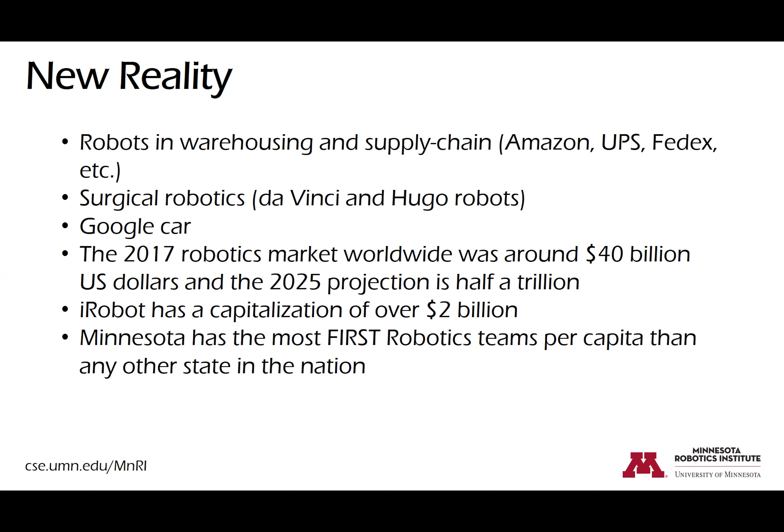And if you look at the numbers, they are staggering. For example, the projection is that the robotics market worldwide in 2025 is going to be $500 billion. If you look at companies that really were disruptive in this whole robotics enterprise, iRobot has sales of hundreds of millions of dollars and a capitalization that exceeds $2 billion. And if you look at outreach, robotics is one of the most effective ways of reaching all these kids and promoting science and engineering. And Minnesota has more FIRST robotics teams per capita than any other state in the nation.

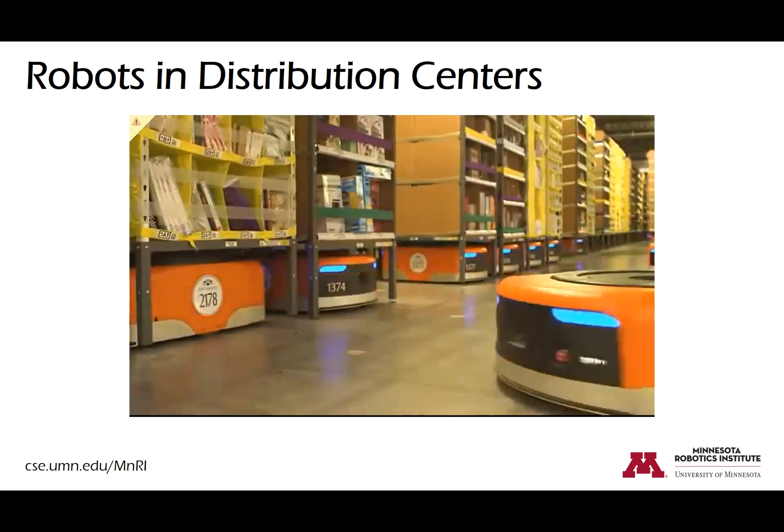So I want to show you a few video clips. This comes from Amazon. And we're going to see all sorts of mobile robots, manipulators. So the orange ones are basically Kivas that became Amazon Robotics, which are used in order to move goods. And these do not only need to interface with other robots, but also they need to interface with humans. Especially in busy periods, one of the biggest problems is actually how the human workers may interact with these mobile platforms that you see here.

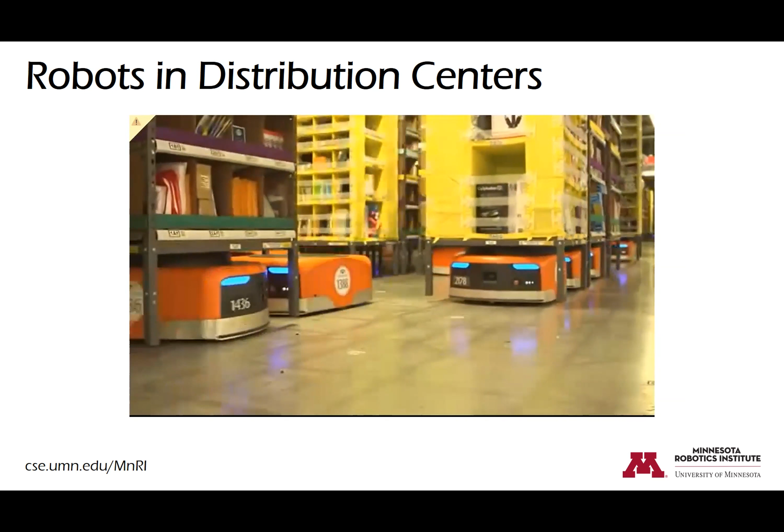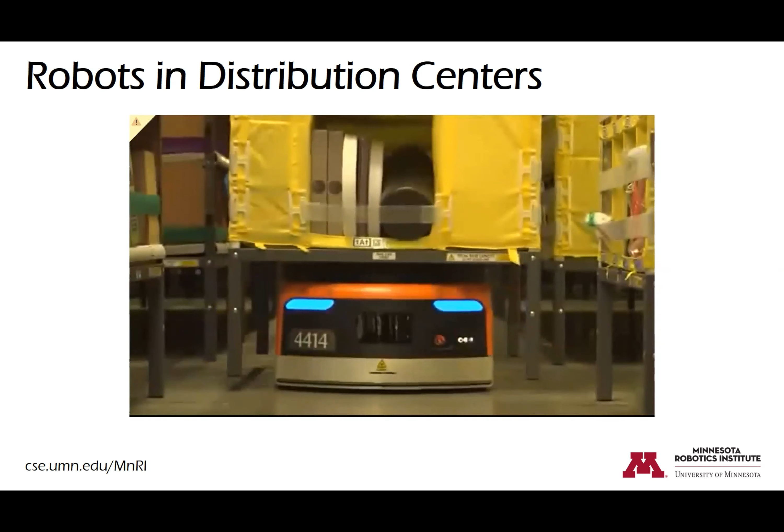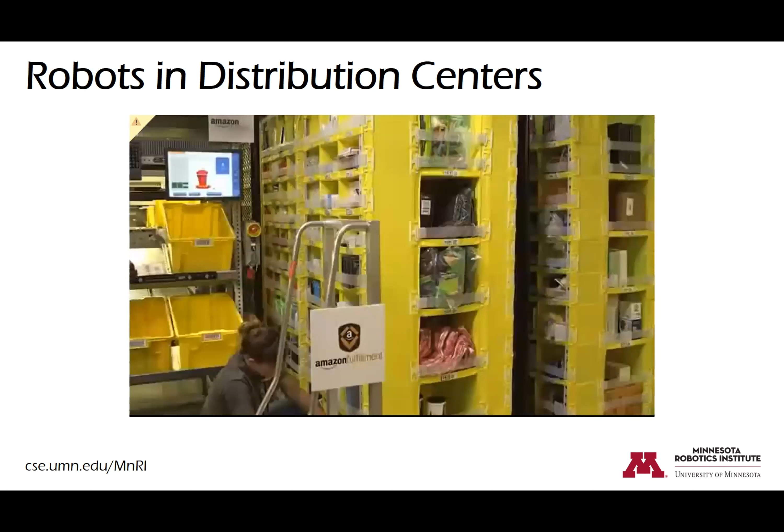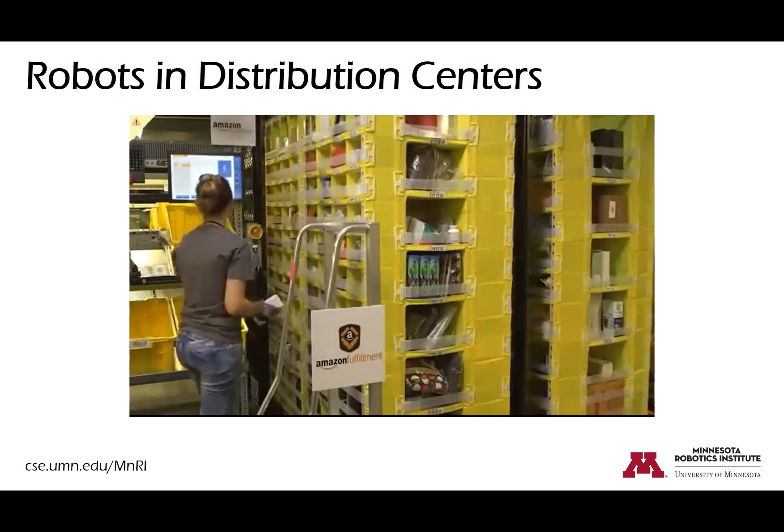Now, the implications of robotics are fairly obvious when we see all these problems in supply chain. And think also about automation and robotics being part of autonomous trucks, because we have a tremendous shortage of truck drivers, and what robotics technology may offer in that domain as well. Another aspect that's very interesting and is not clear from this video is the use of robotics to augment the capabilities of the human worker, like exoskeleton devices that the worker can use in order to be able to lift weights.

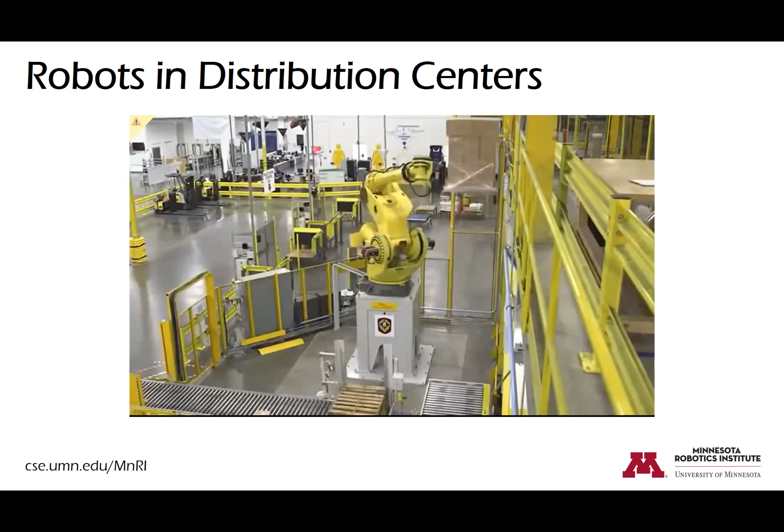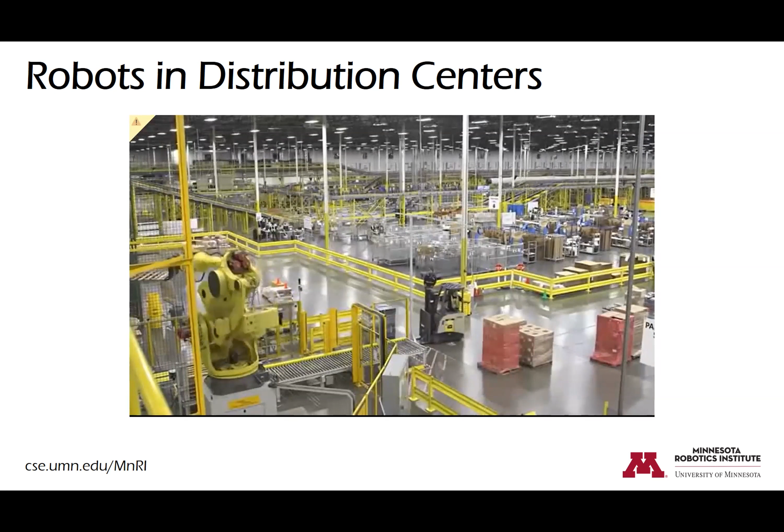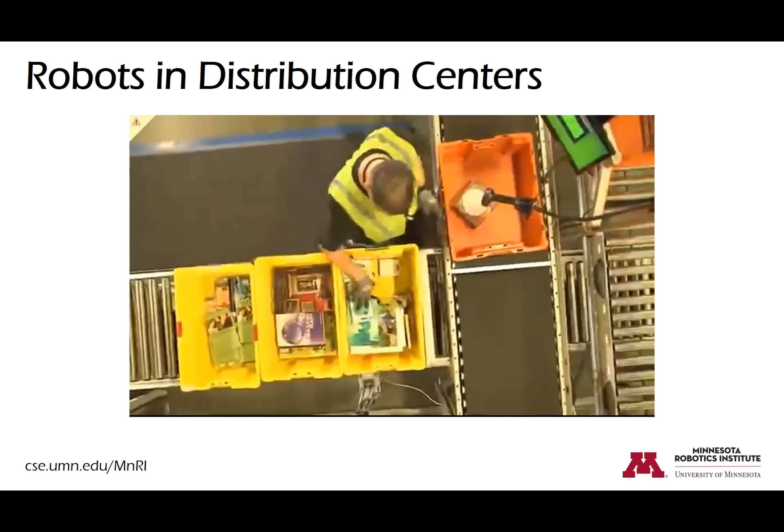Here you are going to see something that is little known, but Amazon warehousing is one of the heavier users of all these monsters, manipulators that move whole pallets. And you can see, if you visit the Amazon facility in Shakopee, some of these robots in operation. And these are used more heavily in 24 hours than the Kiva robots. With the Kiva robots, there are still issues of integration, interaction with humans, and so on and so forth.

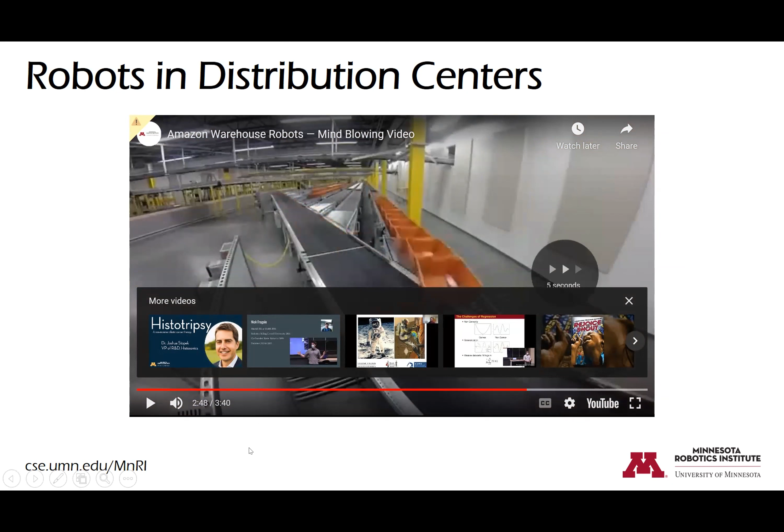So I'm going to stop here and move on. So if you look at some gaps, and these are a few of the reasons that drove us to create the Robotics Institute, there is a lack of proper training that blends robotics with other disciplines, for example, design, ethical issues, engineering, real-time programming. And we need a more holistic approach to the curriculum that is going to provide the proper background. There are concerns about data privacy and a loss of jobs.

And in fact, whenever they ask me about this, I mention the example of Protolabs, which took an industry that was lost in Minnesota, and now they employ more than 2,000 employees. There is injection molding, but injection molding in the digital age plus 3D printing, and it is one of the companies where the presence of UMN alumni is very significant. And I mention this as an example of additional jobs that we can create by effective use of robotics and automation. We need to rethink and redesign planning, control, sensing, and actuation with an emphasis on producing real-world robotic systems.

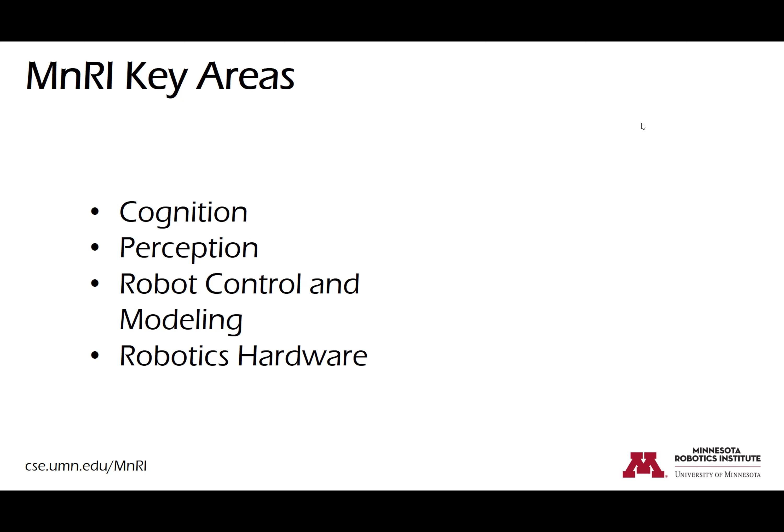Some of the work that is happening at MnRI and the students of MnRI, who are not only the master's students but the PhD students: I will show you the work of Ruben Desa on a transformer UAV. And you can see a UAV that starts as a quadrotor. Ruben was with us as a freshman, then moved to OpenAI, and now moved to another startup in Silicon Valley. And you can see how the device was transformed into a fixed wing state. Another transformation to a quadrotor. And you can hear the screams, and you can see Ruben celebrating.

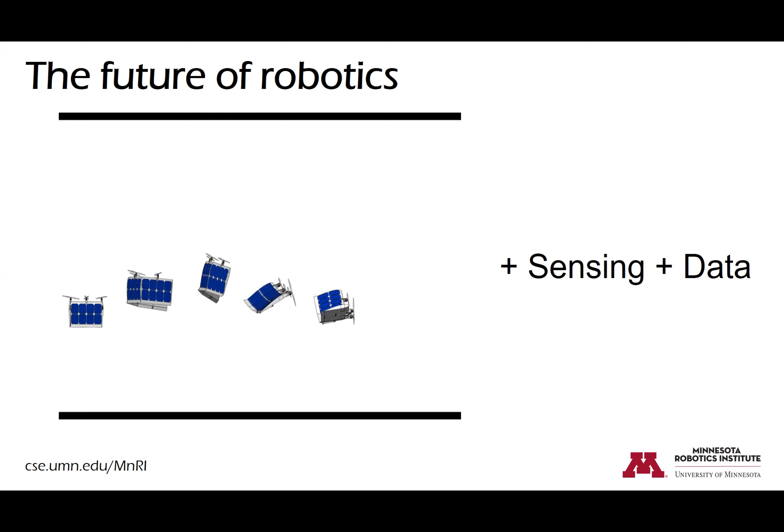My view of robotics is that robotics is all this very cool hardware, but even if we forget this hardware, what remains is actually sensing and data. We are seeing more and more advancements coming in data-centric systems, especially if you look at medicine or agriculture.

The new direction is that we need to take data as part of our mission and training. We want roboticists who can harvest, process, analyze data, and extract useful insights. There's no current training for roboticists that brings together skills such as machine learning, statistics, cloud computing, and visualization.

Let me say a few words about the master's in robotics. Currently we have 65 students, minus 5 who graduated early this fall, so 60 students. We plan to accept another cohort of around 35 to 40 students. This is a 31 credit course, heavily focused on research, either with a Plan A master's thesis or a Plan B capstone project.

The elective courses are provided by all sorts of departments, ranging from design, housing and apparel, to aerospace engineering, computer science, electrical, mechanical, biomedical, statistics, and math. We have 65 faculty involved to some degree. Another characteristic is that we have a very high retention rate. All these years, we've lost only 2 students, for reasons that didn't necessarily have to do with the institute or the efforts.

More than 50% are directly supported by MnRI, teaching assistantships, or research positions. In fact, as I'm interviewing new admits, it's very difficult to convince them because the majority of other master's programs, almost all of them, do not offer any financial support. But we're very fortunate that we have MnRI support to support these kids in their education.

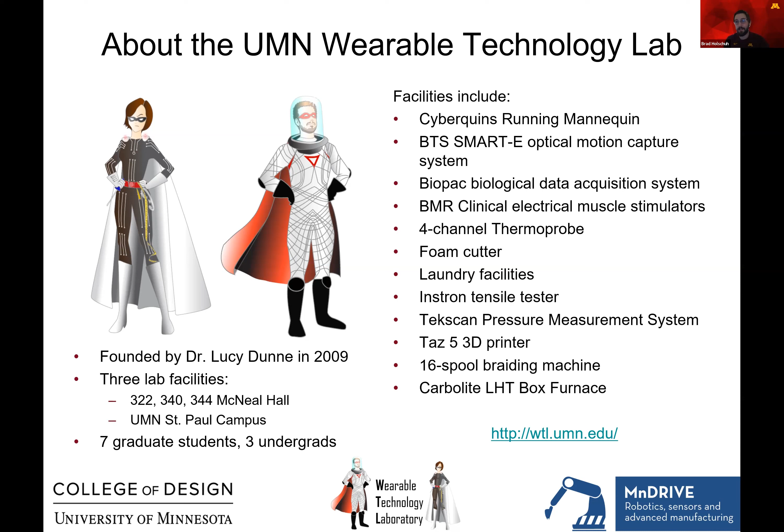So to get into what I want to talk about today: we think about wearable robotics, but in particular we look at soft robotic systems. So getting away from the paradigm of big, rigid, powerful, but bulky systems on the body, which are sort of the robots classically imagined, with exoskeletons being a prime example. They're big, they're powerful, but they're rigid superstructures that sit on your body.

What happens if robots now enter this space of soft robotics, which, as we all know, is an emerging discipline? What if those are soft robots that are on our body? Can we get them to the point that they're indistinguishable from the clothes we wear every day? And what does that mean while providing some sort of robotic aspect of control, actuation, and sensing to a person, without sacrificing the important things we care about in the clothes on our body right now?

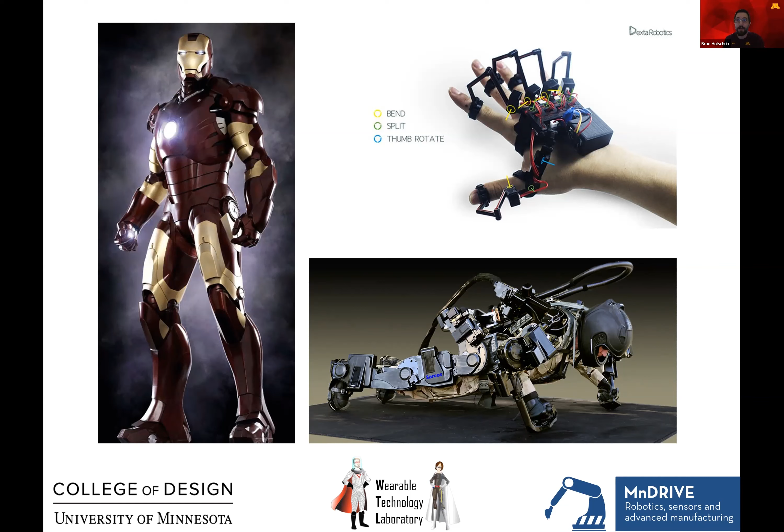So we study in our lab many different types of actuators that are soft in form factor, but still robotic in nature, meaning they have an actuation, a stimulus response behavior that can give us mechanical effects. If you want to define a robot, that's how I would define it. And so there are dozens of materials that are alternatives to your standard hydraulic, pneumatic, or servo electromechanical actuators, that have a mechanical response behavior to them.

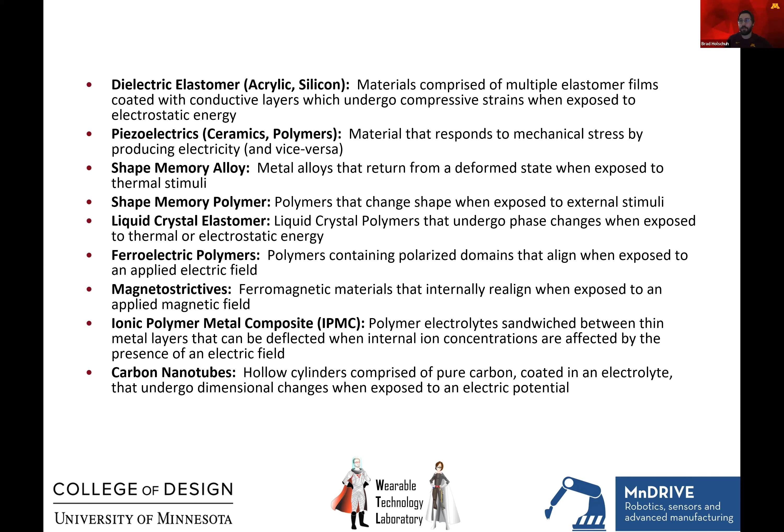So we look at these exotic, oftentimes called artificial muscle materials, in particular for integration into wearable systems. One of the materials we work with often, because of their commercial maturity, are what are called shape memory alloys, or SMAs. They are temperature responsive materials, and over a certain range of critical temperatures, they will go from malleable and deformable into stiff and elastic. You call that the shape memory effect, which means as you heat it up, it will change shape into a shape that we care about.

And that you can engineer. Above those critical temperatures, the metal will act elastically, so you can call that a super elastic effect. There are two really useful properties of these alloys: as you heat them, they will conform and create a shape that you can engineer, and above those temperatures, they will be elastic, so they can respond elastically on the body and be deformed, and provide a force. That's a really useful property.

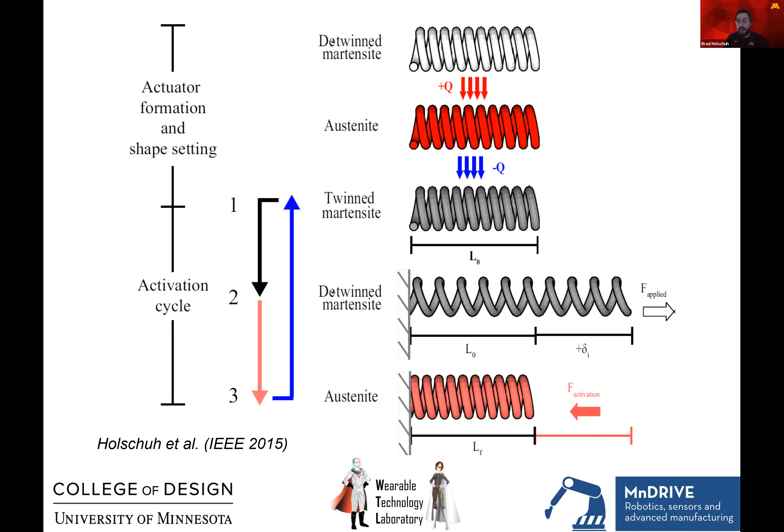We take these materials, which you can buy off the shelf, and do a bunch of manipulations to make them useful for wearable robots. One example is taking these wires and forming them into very tightly wound, millimeter diameter springs, so that they achieve the behavior you see on the screen here: at low temperature you can deform and extend them, and when you heat them up, they recoil and shrink down to their shortest length. In that form, they act as an artificial muscle and produce linear forces and displacements. So here's a video of one of these.

Here we flip the switch, we have an actuation effect. One of those springs is about 1 millimeter in diameter. They run a bunch of them in parallel, and they become a really useful artificial muscle. So this whole structure on the slide is about 1 inch, maybe a bit more than 1 inch in length.

And it's mostly soft, except for those end caps, which we 3D print. Now you can take a structure like this, place it at the seam of an otherwise passive garment, and produce a muscular effect, so a pulling force or a displacement or a tension or a pressure.

We also work really closely in collaboration with another lab here at the U and with another faculty member, Professor Julianna Abel, who's in mechanical engineering and also part of the Robotics Institute, to look at creating textile-based actuators. So can we take these same shape memory materials and form textiles entirely out of these materials? And if you can do that, what are the actuation properties and what are the opportunities then to take these textile actuators and make useful systems on the body?

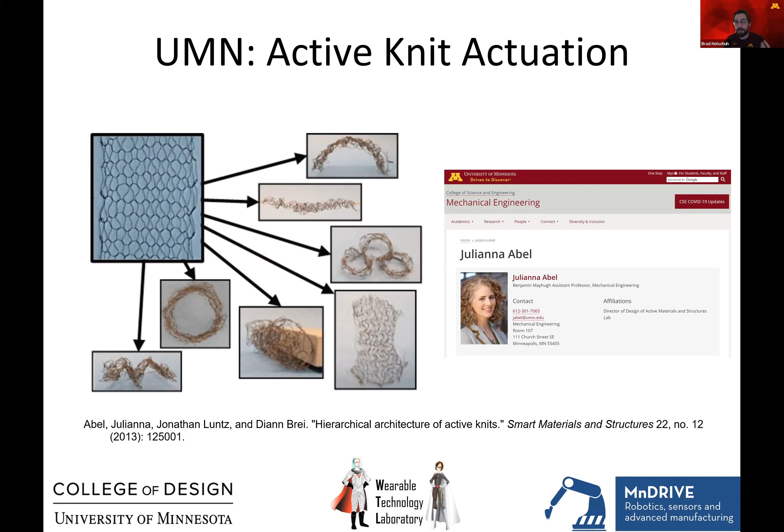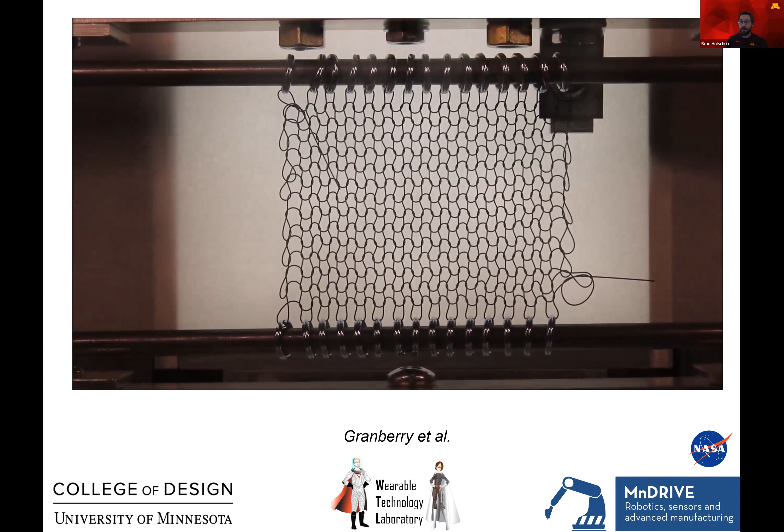One of the strategies that has worked very well is to knit these materials. So this is an example of a metallic knit made from an SMA that, again, when heated up, creates a pulling force, and it's entirely textile based. Because this is a textile, it very easily integrates into a garment, but as you can see, it can create actuation properties where one axis of the textile shrinks and the other axis expands. Every time you heat it up, you'll see this similar behavior.

I don't have a lot of time left dedicated to me, but I'm going to go through a whirlwind of quick examples of how we use these systems to make useful wearable robots. Then we can talk about them in more detail when we have time for questions at the end.

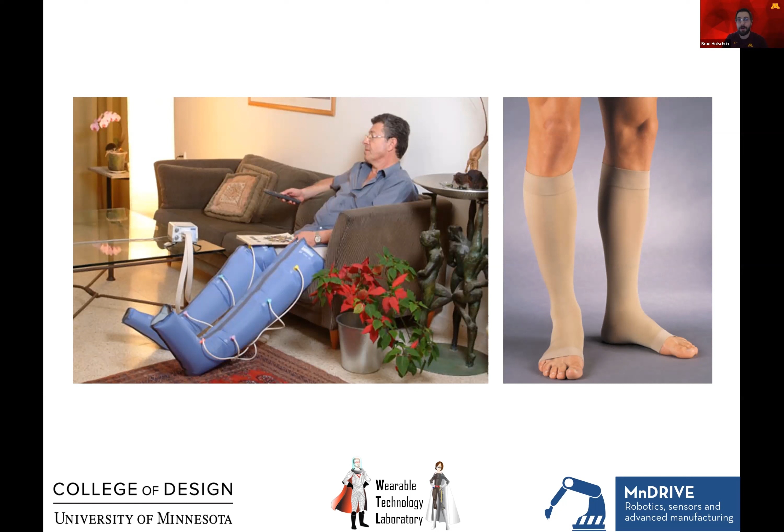One space where wearable actuation can make a big difference is in the medical devices space, in particular in the design of compression garments. Types of compression garments you see on the market right now are one of two form factors: either a big inflatable, which requires you to sit still while they compress you, or an elastic stocking that's too small for you, which is a pain to put on and squeezes you all the time, even if you might not need it.

Imagine now you make a garment that includes some of these shape change materials, and now you can make a compression garment that can squeeze you strategically, dynamically, and change those locations and magnitudes over time to give you much more elaborate medical interventions for poor circulation.

We've had a project with the Mayo Clinic, now with the University of Minnesota Medical School, looking at these as deployable solutions. We also look at compression garments for behavioral intervention. People use compression garments on the upper body to try to calm people down. If you've ever seen thunder shirts for dogs, or swaddled an infant, or worn a weighted blanket, there's a lot of evidence out there that haptic compression on the upper body can calm you down.

But the same problems exist in the technologies on the market today for these types of interventions: either they're a big inflatable, or an undersized shirt that's just always squeezing you, or taken to the extreme, a crazy contraption like you see in the bottom left here, where you stick somebody in a giant roller device just to push against their body.

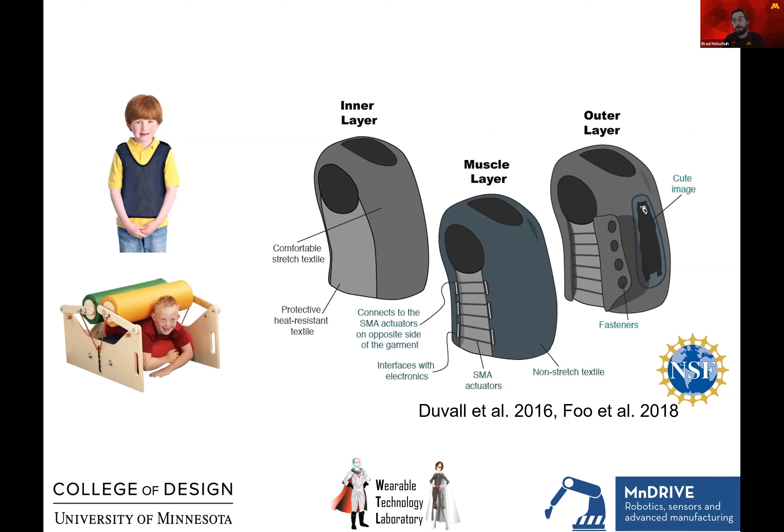We can make upper body garments that do the same thing, with these actuators effectively hidden along the seams, giving dynamic compression at the flip of a switch or by a press of a button on your phone. Here's a child-sized garment that can give you dynamic squeeze, and we've been able to show you can squeeze people beyond the magnitude of a medical grade stocking unobtrusively, using these actuators, again, hidden down the seams of the garment.

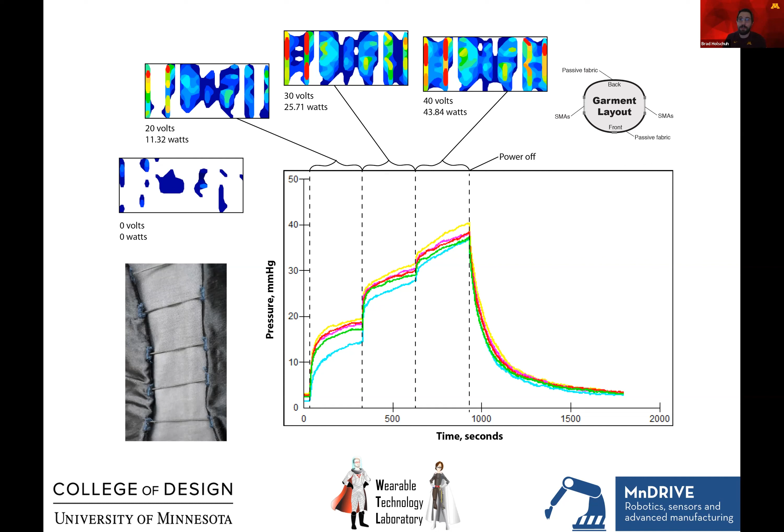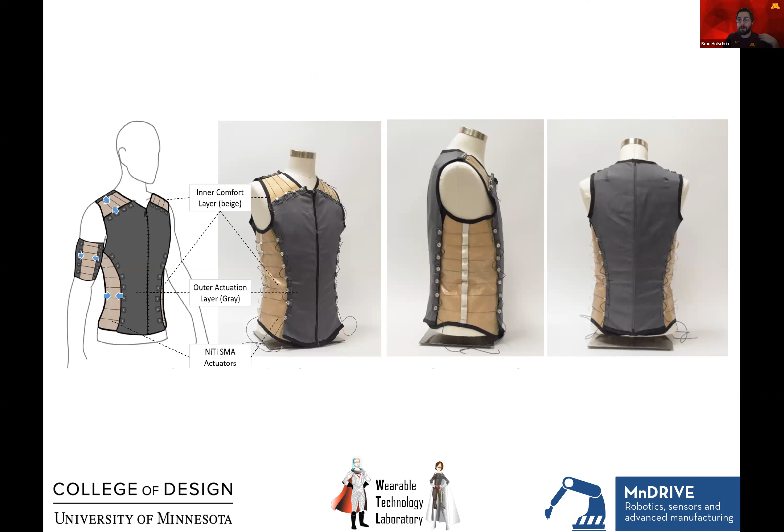We can also produce these for adults. There's no reason this can only be for children, even if we're targeting things like anxiety, autism, or sensory processing disorder. Adults respond well to this stimulation as well. So here's a garment that, down the side seams, across the shoulder, even down the arms, can create dynamic compression. We've also started studying these systems as interactive devices for virtual and augmented reality.

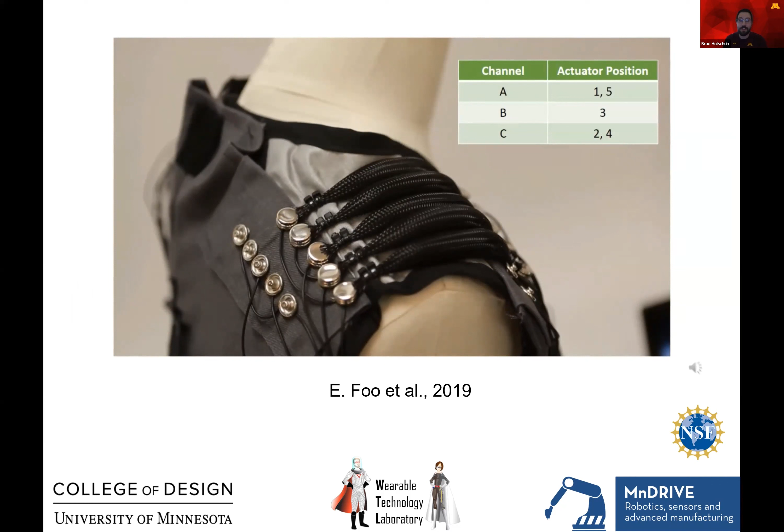So now having this ability as a platform across the body to squeeze people strategically to give them stimulation can create opportunities for novel experiences. This is an example of one of these garments in action. The great thing about these actuators is each one is effectively just a resistor, so you can control them independently from one another. Here you see us toggling some of the channels across the shoulder and then strategically activating more and more of them to create dynamic effects, both spatially and temporally. This is all relatively easy to do with these types of actuators.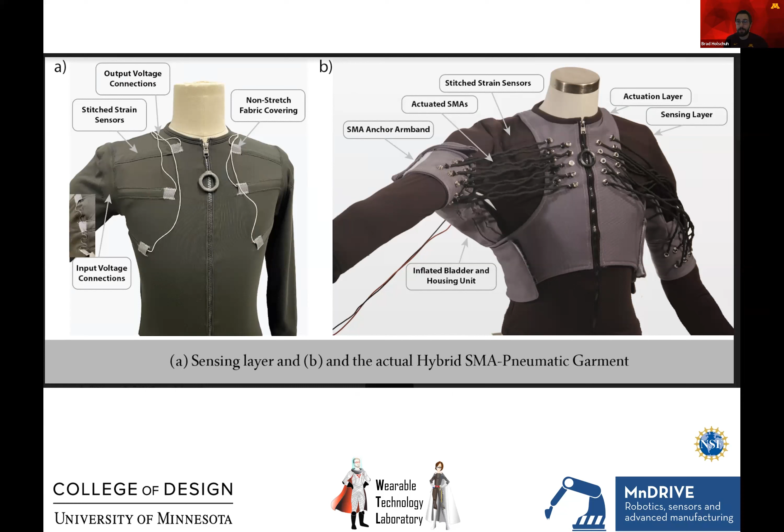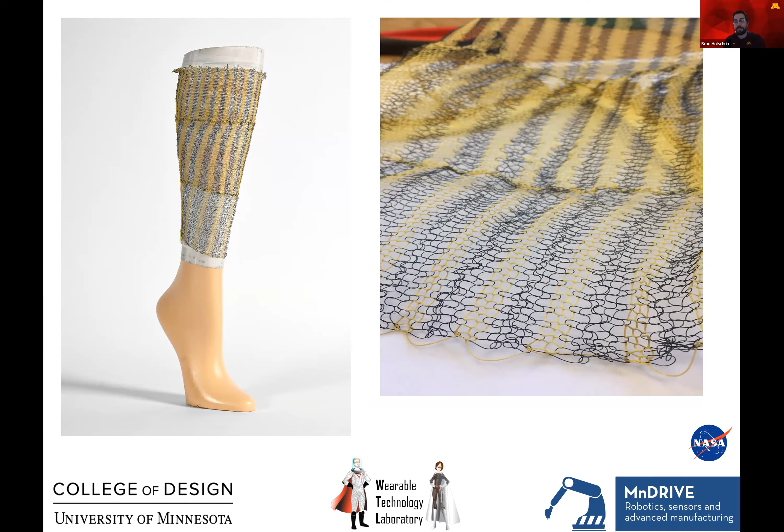And here's one final example of what a custom leg sleeve could look like that uses these knitted actuators. So if you know someone's shape of their leg, you now can create completely three-dimensional, completely conforming, topographically perfect garments to fit what's a pretty complex shape of somebody's lower leg, to give them a custom experience and a custom fit that requires nothing more than the application of heat.

So that's the end of my short talk here, but this scratches the surface of what we think about in the Wearable Technology Lab, which is this question of: can we blur the line between robot and clothing? And what are the technologies required to do that? What are the user experiences of wearing it? And what are the interesting ways that we can take advantage of that, so that the things that we wear can no longer be passive garments? They can be robots that we interact with and interface with throughout the day.

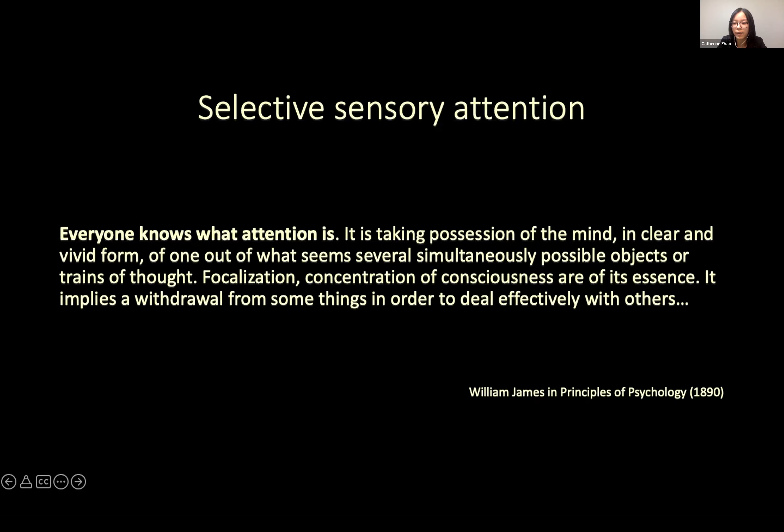So in the next about 10 minutes, I'll illustrate some of our works in attention and its integration to machines. Here I borrowed the working definition of attention from William James, the father of American psychology, who said more than 100 years ago that we all know what attention is. It's essentially the withdrawal from some things in order to deal effectively with others. And the input to our retina is simply much more than our brain can handle in real time.

So we have to attend to somewhere in order to react in real time, and it has an evolutionary significance. The same thing for machines nowadays, with an overwhelming amount of sensory data. So knowing where to look and making inferences accordingly is very helpful for machines, for those autonomous agents, to answer questions, to solve problems, and to navigate and interact with the world with greater autonomy. And it also causes all sorts of economic and maybe political interest for people who would like to control your eyeballs, influencing your reasoning and decision-making process.

So this slide sketches the development of attention research. Before the year 2006, people predominantly used synthetic images and the traditional setup to collect data. The transition to more naturalistic scenarios was more recent, and I'll be introducing a few works that reflect our contributions to this transition that features naturalistic scenes, big data, and immersive paradigm.

So we first addressed the so-called scalability challenge. This has been a long-lasting challenge in attention research that makes the study pretty small scale, as data collection depends on highly customized and most of the times expensive eye tracking devices. So I'm not going into the details, but we innovated an experimental method that allows the collection of high quality gaze data with general purpose devices like iPad, general computer mice, and so on.

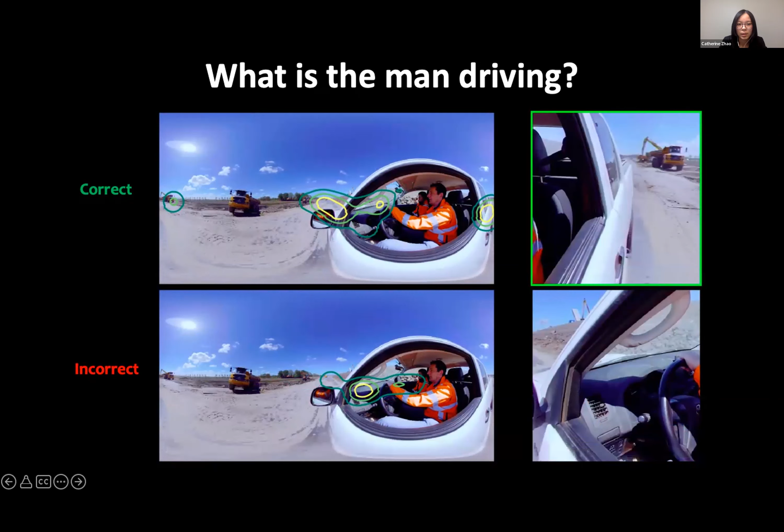And then we build deep neural network models that feature attention and memory, as well as leveraging both types of attention, correct and incorrect attention, to perform a wide variety of tasks. So please note that incorrect attention, the regions where people or models tend to look but are not relevant to the task, the distractors, they're widely ignored in the community.

And we, for the first time, leverage this to build models, which demonstrated much enhanced performance in both attention prediction as well as the task at hand. In this case, the accuracy of answers when answering questions. And then the next step, besides demonstrating that attention is helpful for model performance, we further leverage it as an interface to visualize the decision-making process and try to improve that.